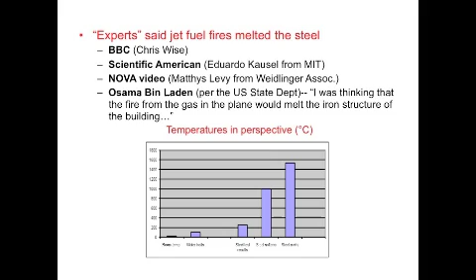We heard this from BBC, Scientific American, Nova, and from Osama bin Laden himself. But that can't happen. Diffuse hydrocarbon fires don't melt steel. At least one 9/11 Commission chairman still thinks the steel melted, though. So does the leading Republican presidential candidate, Mitt Romney.

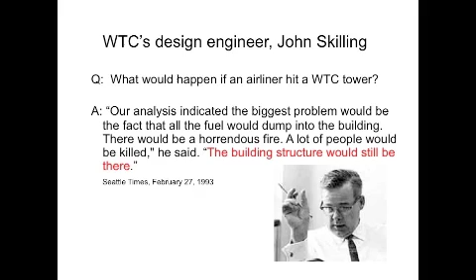After the 1993 World Trade Center bombing, the question was put to the World Trade Center's design engineer, John Skilling. What would happen if an airliner hit the tower, he was asked. He said, there'd be a big fire and a lot of people would be killed, but the building structure would still be there.

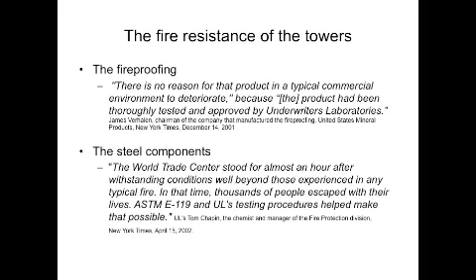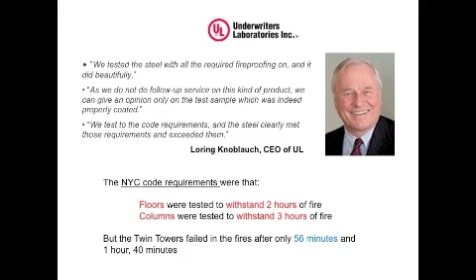That's because all tall buildings are designed to resist fire. The World Trade Center had fireproofing, which had been tested and certified by Underwriters Laboratories. It also had steel components that were tested and certified by Underwriters Laboratories. This World Trade Center fire resistance testing was confirmed to me directly by the UL CEO, who said, we tested the steel and it did beautifully, and we tested the code requirements. Those code requirements required far more fire resistance than the buildings actually exhibited.

So how did it happen? In 2005, the government finally put out its World Trade Center report. The NIST agency is part of the U.S. Department of Commerce, which at the time was run by George W. Bush's good buddy and oil executive Donald Evans.

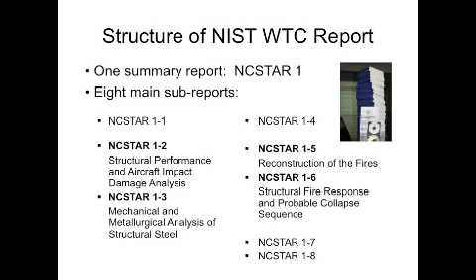The report is very large and very redundant. And NIST's stated goals were to explain why and how World Trade Center buildings 1, 2, and 7 collapsed. NIST did a few tests to determine the answers, but NIST did not end up explaining how the towers fell, only how collapse was supposedly initiated.

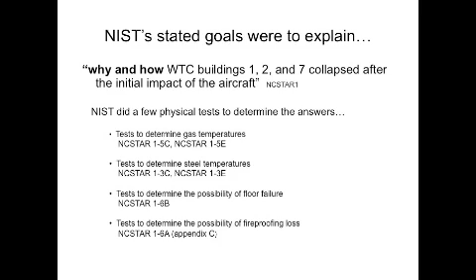NIST's final story can be broken down into 7 general steps for each of the 2 buildings. These steps are listed here. We'll examine each of these to see if NIST's story holds water.

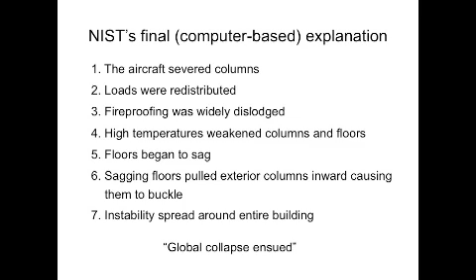The first is that columns were severed, but really only a small percentage of columns were severed compared to the design requirements.

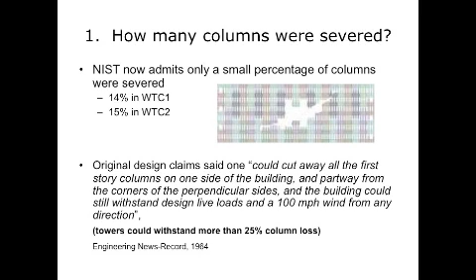NIST then said that fireproofing was widely dislodged. In fact, they made it clear that the towers would not have collapsed if the fireproofing had not been widely dislodged. So NIST must have really done a lot to prove this critical claim.

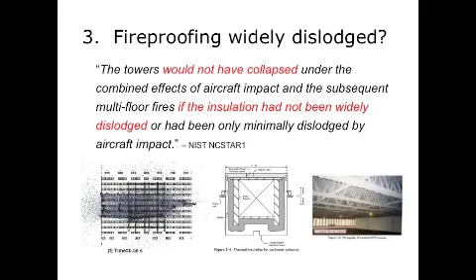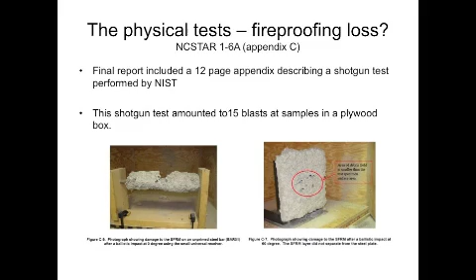But the fact is that NIST's draft report said nothing about it at all. The final report, however, included a 12-page appendix describing a shotgun test. The shotgun test amounted to 15 blasts at samples in a plywood box. Could a Boeing 767 be turned into many thousands of shotgun blasts? NIST did nothing to prove this concept.

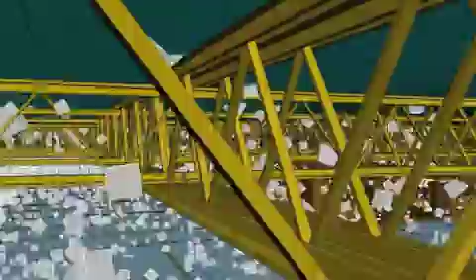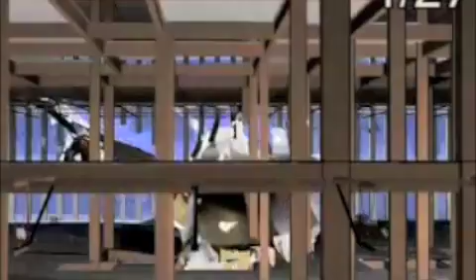But thankfully, the good people at Purdue University were able to prove NIST wrong. This reverse angle shot visualizes the impact damage sustained by some of the core columns. Using a camera with a distant hither plane, this sequence simultaneously visualizes the two floors that sustained most direct impact damage.

No shotgun blasts there, and the energy to do this was really just too high. NIST, in fact, disproved its own theory with its shotgun tests.

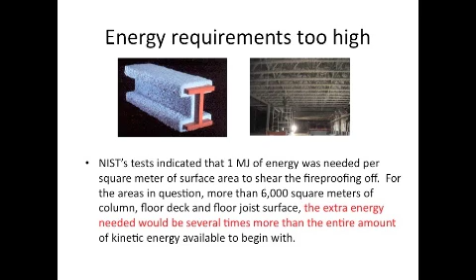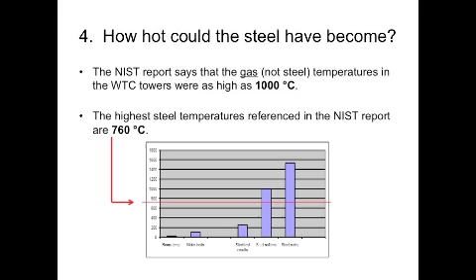Despite this problem, we should ask, how hot could the steel have become? NIST says that the gas temperatures in the World Trade Center towers were as high as 1,000 degrees Celsius, and the highest steel temperatures were about 760 degrees. Again, no melting could occur at these temperatures, and probably no softening either.

But NIST's physical tests on steel temperatures show that the steel temperatures were even lower than that. They were really only about 250 degrees Celsius. NIST seemed to have selected the wrong samples for these tests.

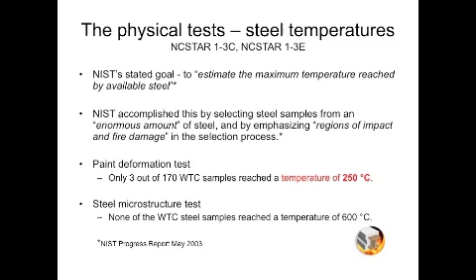What's important, though, is the temperature in the failure zone. We need to know, how long did the fires last in the failure zones? Given that they had to migrate around the core, and that took so long, there really was only 45 minutes, particularly for the North Tower, in the failure zone.

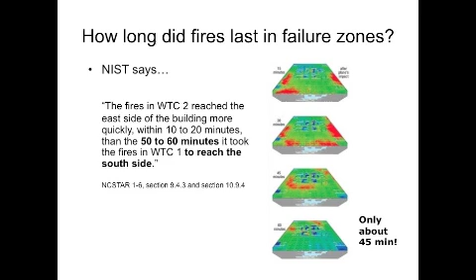After 45 minutes, how much floor sagging could occur? The tests that NIST did showed that only very slight sagging was possible, only about 3 inches. But in the computer, NIST turned this into 42 inches of dramatic sagging.

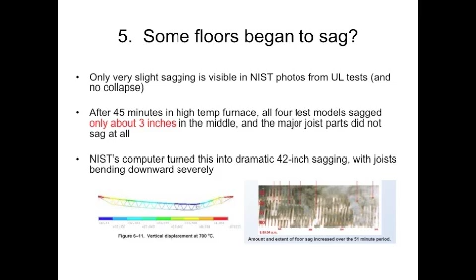To reiterate, physical tests were done by my former company with almost no fireproofing on the floors and twice the load. And as a result, the long-standing pancake theory collapsed.

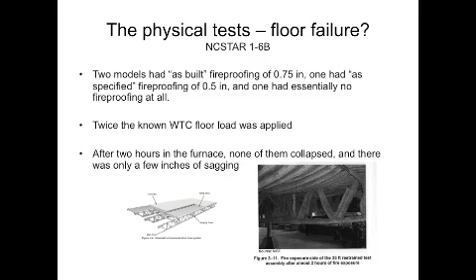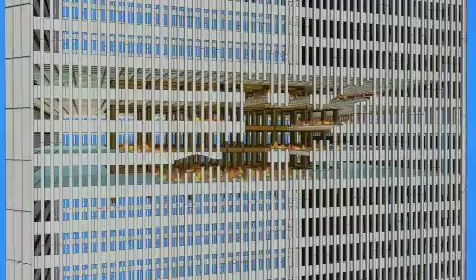Let's take a look again at NIST's fire migration hypothesis. The fires were said to flare up and die down, and then in the North Tower, they moved around the core for 60 minutes.

We might wonder how the east and west walls were unaffected by this. But the south wall was supposedly softened badly.

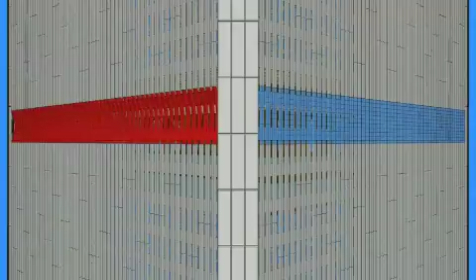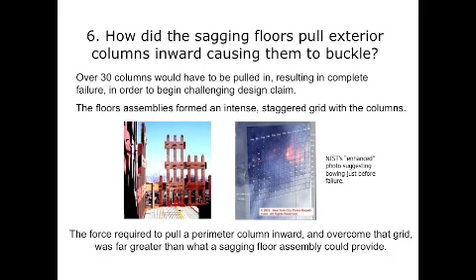So, how did the sagging floors pull exterior columns inwards and cause them to buckle? The floor assemblies formed an intense, staggered grid with the columns. The force required to pull a perimeter column inward and overcome that grid was far greater than what a sagging floor assembly could provide.

A surprising problem is that even NIST knows this, and within its report, it disagrees with its final story. In several sections of the report, it says that this sagging and pulling is really not possible.

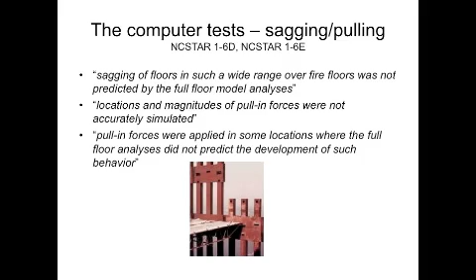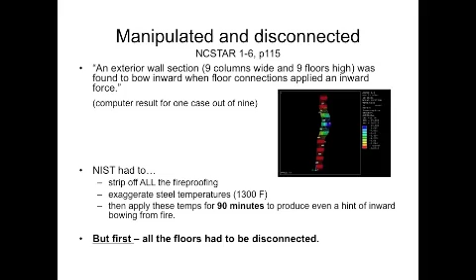But NIST management resorted to 1 case out of 9 in the computer model. In this case, NIST had to strip off all the fireproofing, exaggerate the steel temperatures, apply the temperatures for twice as long as they knew existed, but first they had to disconnect all the floors.

It is ludicrous but true. NIST disconnected the floors in its model and then applied a pull-in force. This is not science.

We know this can't happen, but how did instability spread around the entire building perimeter? To match the evidence, that would have to happen at 1.5 times the speed of sound and result in a perfectly uniform fall with no deceleration.

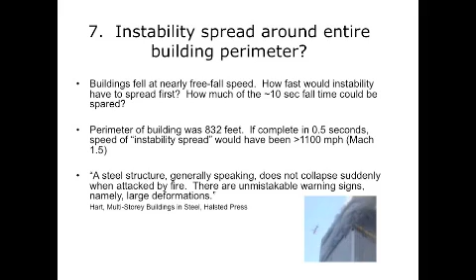In the false world of NIST's World Trade Center computer scenarios, anything is possible. NIST avoided a lot of important evidence by simply saying global collapse ensued.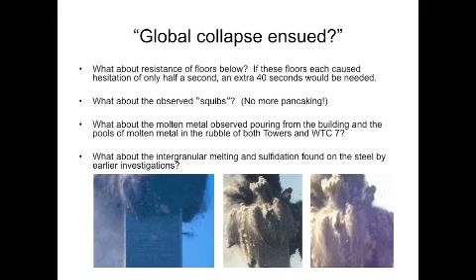What about the resistance of the floors below? What about the squibs? What about the molten metal and the intergranular melting? By ignoring all this evidence, NIST made it clear they had no intention of doing science from the start.

But what would objective scientists have found? Basically, at every step of NIST's sequence, objective scientists would have found the exact opposite of what NIST had found.